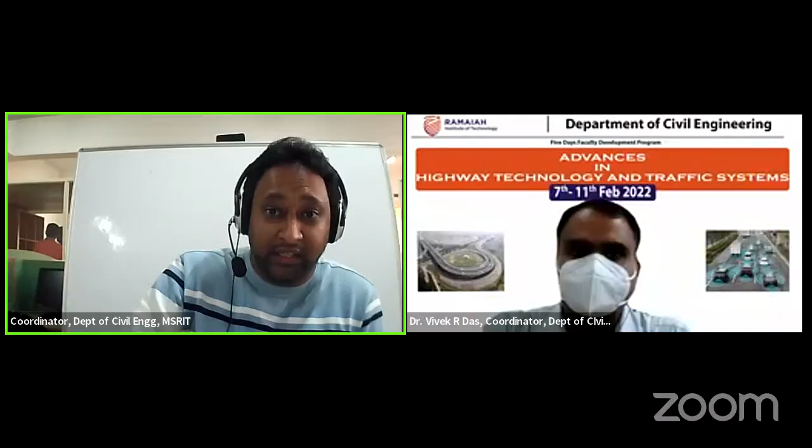On that note, I would like to call upon and welcome our beloved Head of the Department, Dr. M.C. Nataraj, Professor, Department of Civil Engineering, to brief about the department and the institution. So without any further delay, I would like to start with the events. We would be delighted to have your suggestions and questions at the end of the event. Enjoy the event. I welcome you, sir.

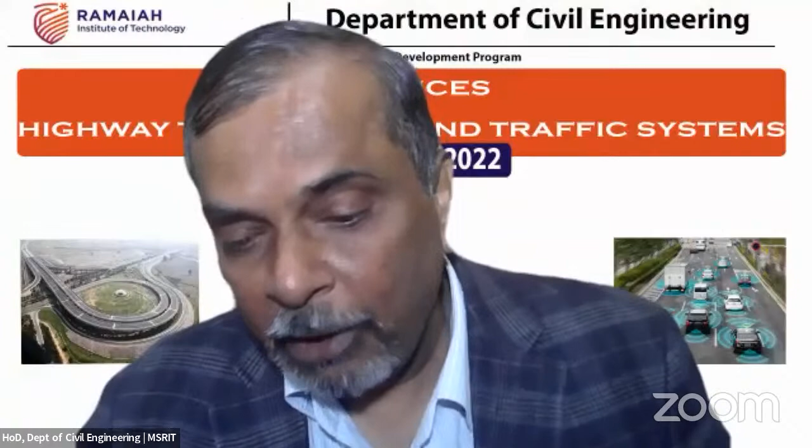So I definitely need to welcome all the speakers who are a part of this 5-day faculty development program. In fact, today we have with us one of the well-known personalities. He is a well-known professional in the civil engineering field, especially in the transportation domain. He is none other than Dr. Satish Chandra, the director, CSIR-CRRI, and the former professor of IIT Roorkee. He will be the first speaker.

And in fact, we have the other speakers. We have Ankit Gupta, associate professor from the Department of Civil Engineering, IIT Bhubaneswar. We have Rajat Rastogi, professor from the Department of Civil Engineering, IIT Roorkee. We have Dr. Ashish Verma, professor from IISc. And we have Arun N.S., a principal engineer and well-known consultant. And we have Partha Pratim Dey, an assistant professor from IIT Bhubaneswar.

And we have M.N. Srihari, my guru. In fact, we worked together earlier, and we have shared our experiences many times with this particular professional. M.N. Srihari happens to be an earlier faculty of MSRIT. We also have Gnanendra Kumar, the additional commissioner from the Transportation Department, Bangalore Urban Division. And we have Madam Kavita, associate professor from RASTA. And also we have Dr. Abhijit, one of the well-known technical persons representing the geotextile division. And also I have four of my own colleagues who are really doing their research in this particular domain.

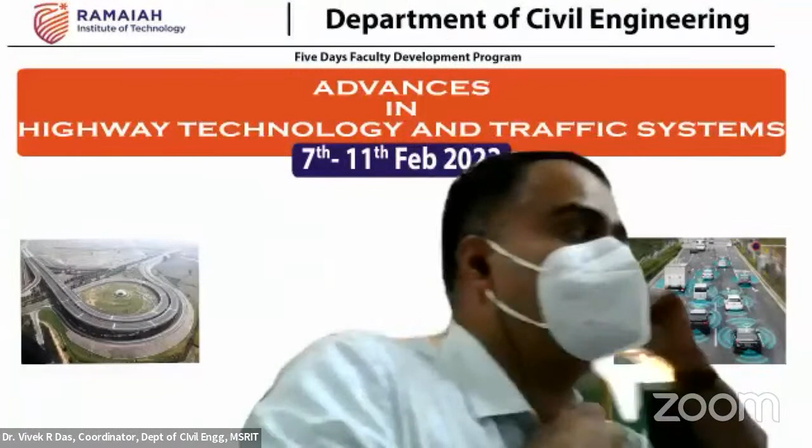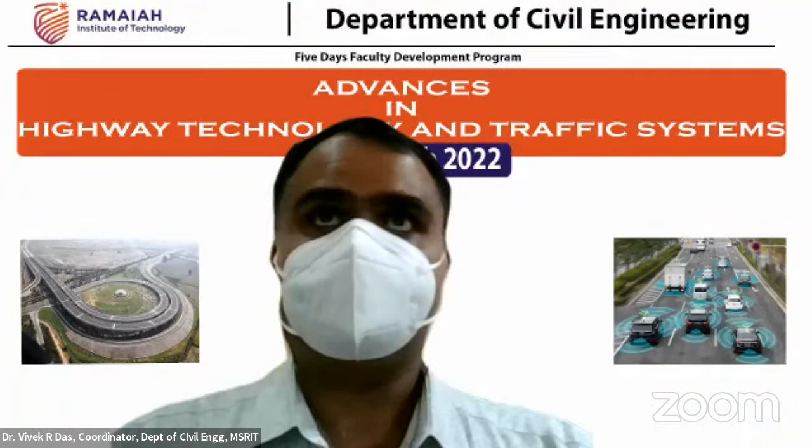Welcome, sir. Dr. Satish Chandra graduated from the University of Roorkee in 1983 with an honors degree in civil engineering and completed his post-graduation in transportation engineering in 1985. He had his doctorate in 1994 from the same university. He joined the University of Roorkee, now IIT Roorkee, as a lecturer in 1985 and became professor in May 2006. He was the Director of the Central Road Research Institute, famously known as CRRI, New Delhi, during 2016 and 2022.

Professor Satish Chandra has contributed significantly in teaching, research, and consultancy in the area of traffic engineering and bituminous material characterization. He has published around 250 research papers in international and national journals and conference proceedings. Many of these research papers are referred widely in India and abroad.

He developed the original concept of dynamic passenger car unit for converting heterogeneous traffic streams into a homogeneous stream of passenger cars. This concept is well received by researchers in India and abroad and has been used in several studies relating to highway capacity in India and other developing countries like Egypt, Vietnam, Cambodia, China, and Thailand. He was a key member of the research team preparing the maiden edition of the Indian Highway Capacity Manual.

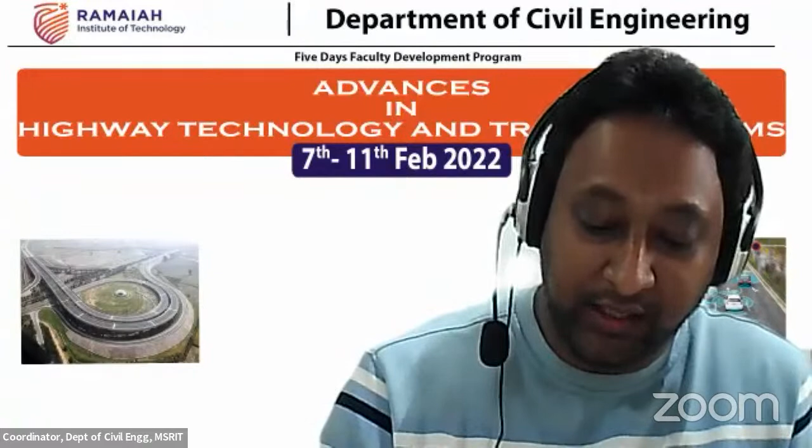He has guided around 21 PhDs and over 100 master's dissertations, and has authored 3 books on engineering graphics, air transportation planning, and railway engineering.

Dr. Satish Chandra has been the recipient of the INSA Visiting Fellowship in 1994 and several outstanding research paper awards by the Institution of Engineers and the Indian Roads Congress. He was conferred with the Outstanding Teacher Award by IIT Roorkee in 2006, and in 2014 he was also invited by IIT Bhubaneswar as an adjunct faculty.

He is a Fellow of the National Academy of Sciences, India, famously known as FNASI. He is also a Fellow of the Institution of Engineers, India, and a member of several other professional bodies. An outstanding teacher and a highly accomplished researcher, Professor Chandra is very popular among students and the transportation engineering fraternity.

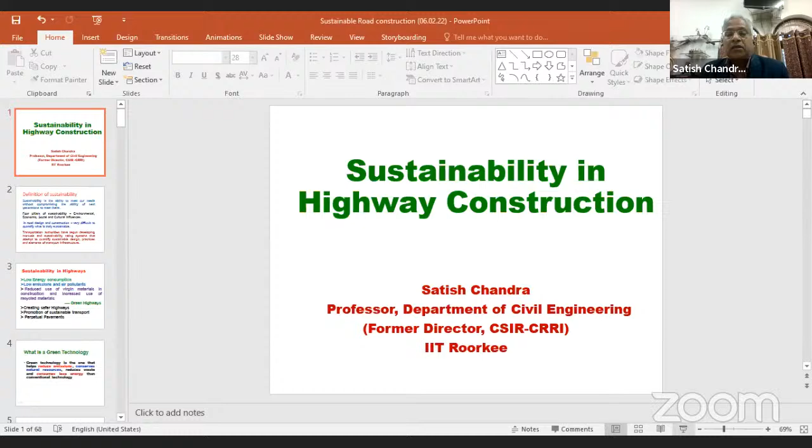Professor and Head, Department of Civil Engineering, MSRIT, coordinator of this faculty development program, Dr. Vivek, and other participants.

The topic given to me today is sustainability in highway construction. Let me just put it up. This word sustainability has been discussed at several forums, at IRC, in the ministry. Its definition basically changes with the field also. If you look at the definition of sustainability, it is the ability to meet our needs without compromising the ability of next generations to meet theirs. That is a very general description of sustainability, meaning the resources are to be used today while keeping in mind the needs of the next generation.

The 4 pillars of sustainability are environmental, economic, social, and cultural influences. So anything which basically does not harm the environment, which is economical, and fits into social and cultural influences, is sustainable.

In road design and construction, it is very difficult to quantify what is truly sustainable. Therefore, the transportation authorities have begun developing manuals and sustainability rating systems that attempt to quantify sustainable design, practices, and elements of transport infrastructure.

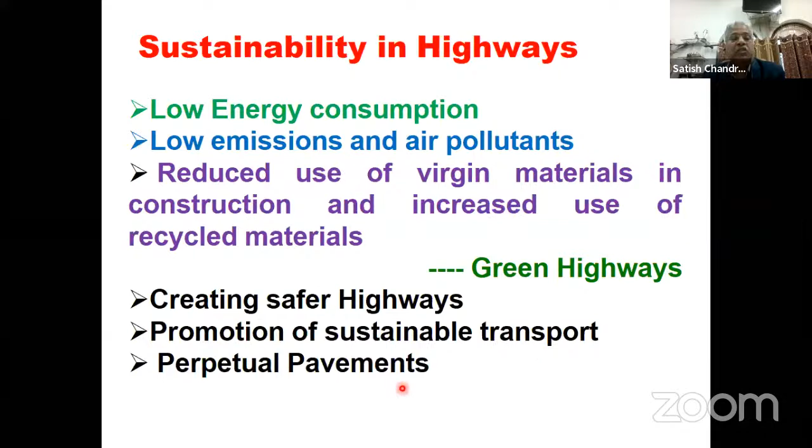Now, when you meet out these 3 conditions, then we call them green highways. And in sustainability, if you extend the definition after construction also, then it also includes creating safer highways, promotion of sustainable transport systems, for example electric vehicles, which Government of India is pushing a lot nowadays, and perpetual pavements, which are practically maintenance free.

Now, when we say green highways or green technology, what is a green technology? A green technology is one that helps reduce emissions, conserves natural resources, reduces waste, and consumes less energy than conventional technology. So if you are able to conserve natural resources, for example replacement of hard stone aggregate, that's a green technology.

If you are able to reduce the emissions, for example if you can avoid heating of bitumen at site during construction, or lowering down the temperature of the heating, that is green technology. So basically, if you can use waste material in construction, that also becomes green technology. I'll give you a few examples of green technology in subsequent slides.

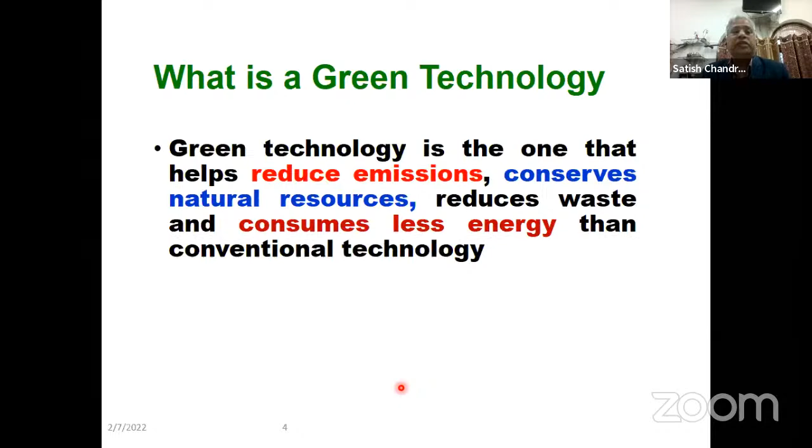Now, every road construction activity needs thousands of tons of material such as aggregate, concrete, asphalt, and steel. And all these are non-renewable resources. Just to give an idea how much aggregate is being consumed in road construction, 1 kilometer of two-lane asphalt road with aggregate base can require up to 25,000 tons of aggregate rock.

And in 2021, India constructed 13,298 kilometers of national highways. Now you can imagine how much aggregate is being consumed in road construction.

This 13,298 kilometers is of national highways only. There are state highways, programs under PMGSY, state government programs also, maintenance of highways also, that will require huge amounts of aggregate. And aggregate is non-renewable. Many states have now stopped mining, and now they are finding it difficult to get hard stone aggregate. This is where basically this green technology should be used, or comes into picture.

Just to give an idea, out of total CO2 emissions, the transport sector has a share of about 13%. And out of this 13%, almost 80% is from road transportation. So when we say green technology, basically our aim is to reduce these CO2 emissions through transport sector activities.

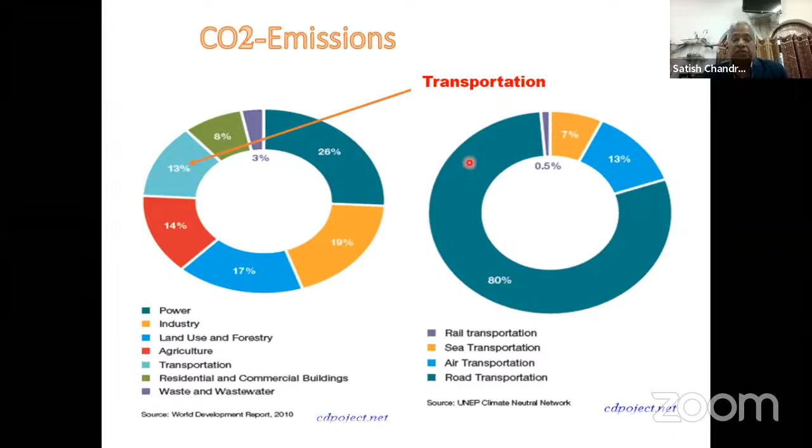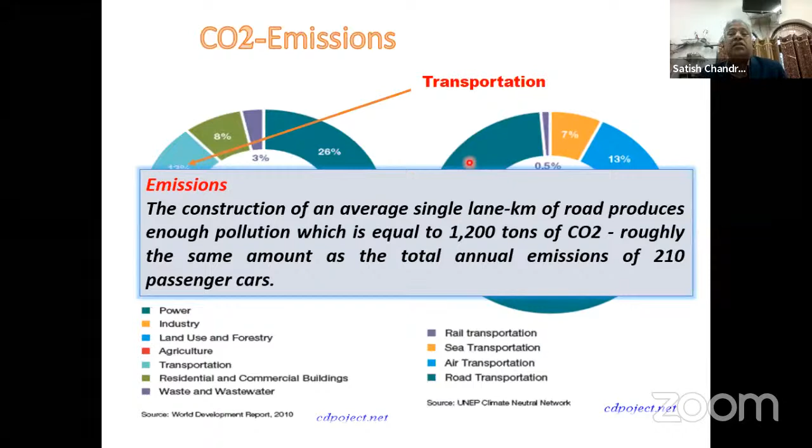And the construction of an average single lane kilometer of road produces enough pollution, which is equal to 1,200 tons of CO2 - roughly the same amount as the total emissions of 210 passenger cars in 1 year. So you can imagine the size of the problem, the dimension of the problem. That is why nowadays sustainability is a very buzzword, and it is being discussed at several forums.

So when you say sustainability or green technologies, there are 4 targets to be met. Number 1, to conserve natural resources, and that can be done either by making use of thinner pavements, or by making use of alternate materials, or stabilization of layers. To reduce emissions, we can use cold mix technology, warm mix technology, or half warm mix technology.

I'll explain all these technologies in my presentation. To reduce waste material, you can reuse the pavement material, that is RAP, and industrial waste, construction and demolition waste, or recycling of pavement, which is also now picking up at very fast speed and consumes less energy. That I told you, cold and warm mixes. Or you can reduce mining by making use of local materials, or you can make use of environment-friendly concrete.

So these are the targets of sustainability: conserve natural resources, reduce emissions, reduce waste, and consume less energy.

IRC 37 2018 talks about the stabilized pavement. Now, this is also one way of reducing the thickness of pavement - cement treated subbase and cement treated base. Now, they are being used nowadays at large scale in all national highways, even expressways also, at state level also, stabilized cement treated bases or cement treated subbases are being used to reduce the thickness of the pavement with the same life.

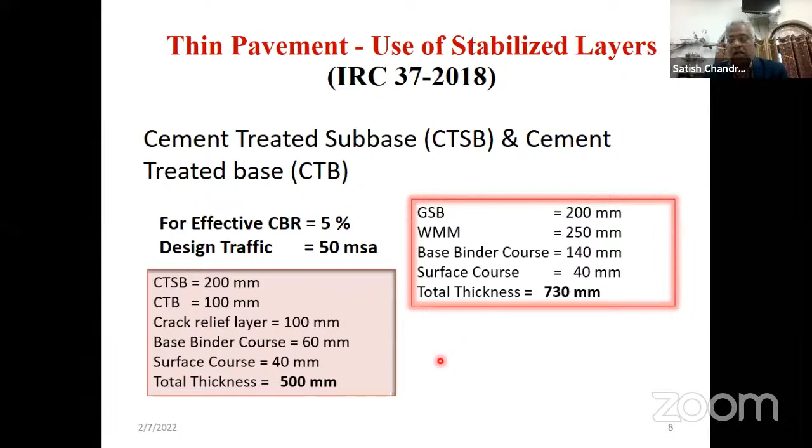Now, IRC SP 59 talks about geosynthetic materials and their functions. Geosynthetic material can be used as reinforcement, again, to reduce the thickness of the pavement. They can also be used in separation, where you have a very soft subgrade, and you do not want the aggregate of subbase to penetrate into the subgrade, or subgrade to penetrate into the subbase layer. We can also use a geotextile or geosynthetic material for filtration and drainage purpose. It is being used in erosion control to protect landslides, or it can be used as a moisture barrier also.

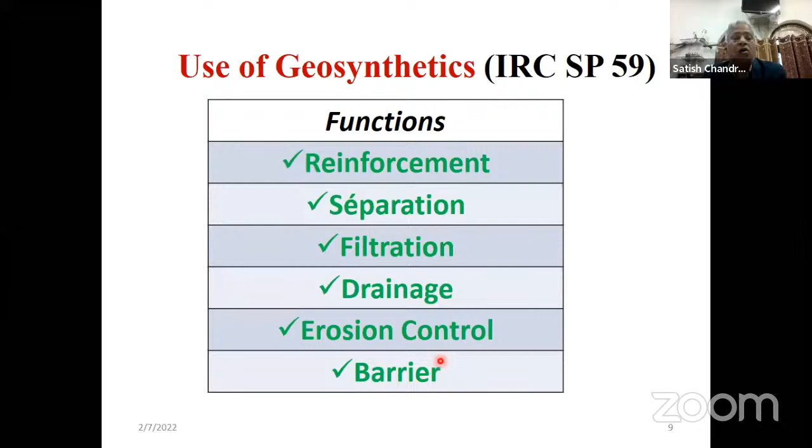There are several advantages of using geosynthetics. One is pavement stabilization. As I told you, when you reinforce a layer, you reduce the thickness requirement in comparison to conventional pavements, and therefore you save the cost also, and you save the time of construction also. And geosynthetics are easy to handle and lay at site, and therefore it's a faster construction and low CO2 footprints.

These are some of the photographs I have taken from IRC SP 59 2019 of different types of geosynthetic materials which are used in highways: geocells, geogrid, geonet, geotextile, and geomat. There are many more. Even you have different types of geotextiles also which are being used.

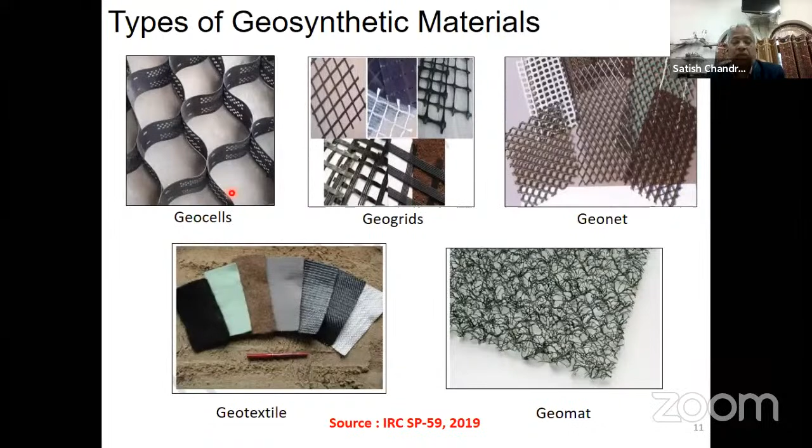Now geocell is coming up very fast, and people are realizing the advantages of using geocell in concrete as well as in flexible pavement.

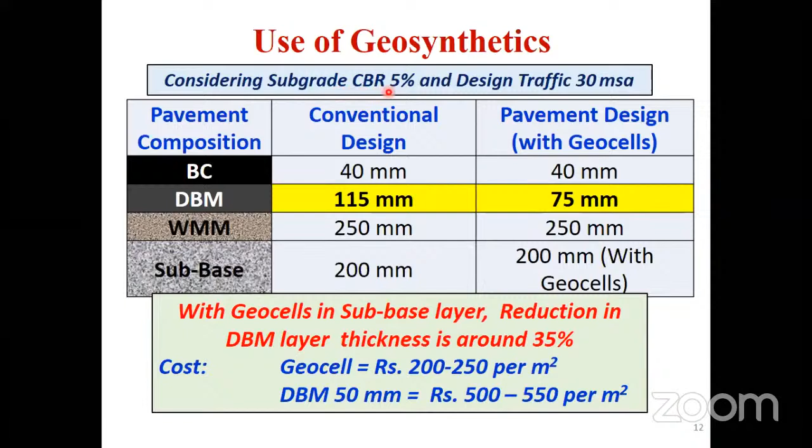And this is another example where you have a subgrade CBR of 5%, and the design traffic is 30 MSA. You design a pavement. Conventional design will require 40 millimeter of BC, 115 millimeter of DBM, 250 millimeter of WMM, and 200 millimeter of sub-base material.

When you use geocell at sub-base level, then you need 200 millimeter sub-base with geocell. Above that, you provide 250 millimeter WMM, same, but DBM layer can be reduced from 115 millimeter to 75 millimeter. Now, why we are reducing basically DBM? It is because this is the layer which is most expensive in comparison to WMM and sub-base, and 40 millimeter BC. So when you use geocell in sub-base layer, you can reduce this DBM thickness by almost 35%.

And a question is always asked: what is the economy? Just for the information of the participants here, I would say that geocell cost is around 200 to 250 per meter square, whereas cost of laying 50 millimeter DBM is 500 to 550 rupees per meter square. So it is not expensive to use geocells. It is economical also. It will give lesser thickness of the pavement, and it will provide faster construction of the road.

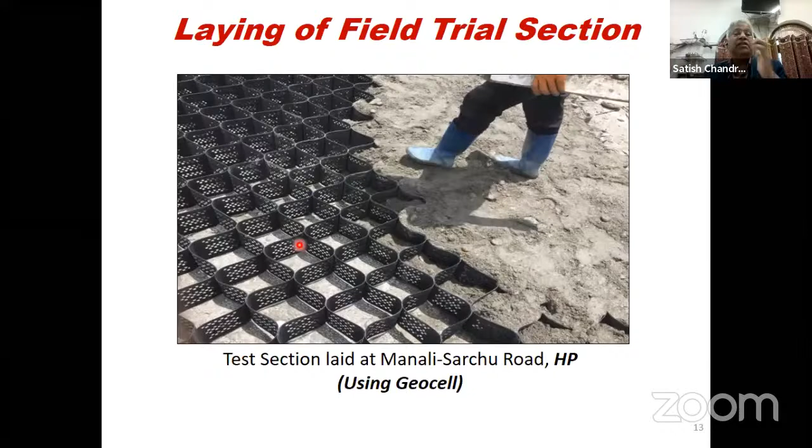Now this is one test trial section which is being laid nowadays in Himachal Pradesh using geocell, and this is the road owned by BRO near Manali Sarchu Road. That is a test section taken for demonstration of use of geocell in flexible pavement. And another section which has been laid very recently in Arunachal Pradesh is with GeoGrid.

Now, this is also, you can see the roll here, you can spread, you can lay this very easily, it doesn't require any skilled manpower. And above that, you provide the layer of base course. This reinforcement layer can be at any stage. It can be between base and sub base, or it can be between base and bituminous course also.

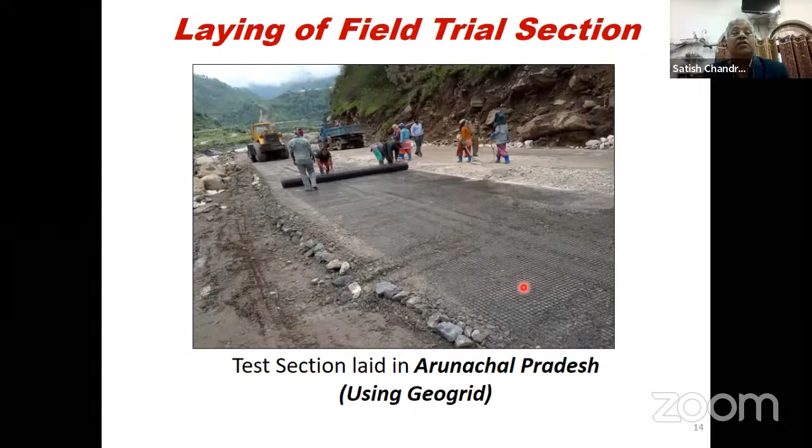Now, after these sections are laid, they will be monitored for 3 years for their performance, and then a report will be sent to IRC for improvement in the IRC code. That is how basically codes are framed.

Another important point which I would like to discuss with you is pavement recycling. Now, this is also coming up in a very fast way nowadays, and people are recommending pavement recycling. What is recycling? Recycling basically is the reuse of pavement material after some processing. So what happens is that when a road has failed, you use the top material or maybe the top 2-layer material to reconstruct the same road.

This process can be either cold or it can be hot. And in cold also, it can be either in plant or it can be in situ. And therefore, pavement material recycling can be classified into 4 groups. That is, pavement recycling can be cold or hot, and cold can be in-plant cold or in-place cold, and hot can be in-plant hot recycling and in-place hot recycling. All the four methods are in use.

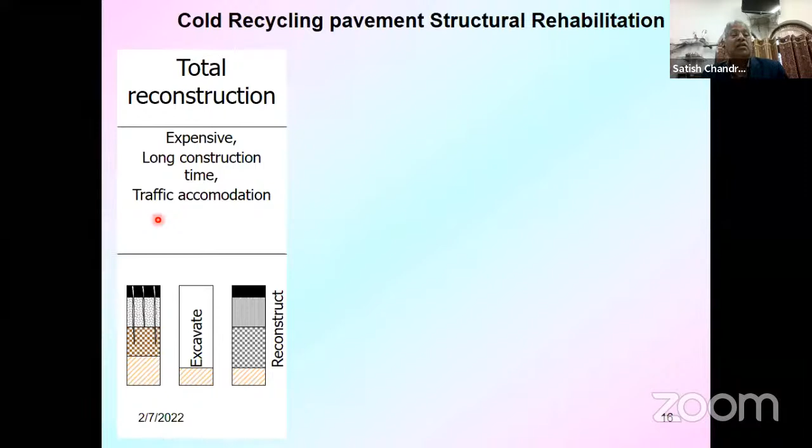Say this example. Let us say you have a road section where very deep cracks have developed, and they have penetrated up to the level of subbase. Now, one option is that you excavate this material, the complete material, and reconstruct the highway. It will naturally be very expensive. It will require long construction time, and you need to accommodate traffic for a longer period, which is also sometimes very difficult because you do not have an alternate route available. So during construction, you may have to provide diversion routes.

Another option could be that above this cracked surface, you provide a thick asphalt overlay. First, you provide a layer of, let us say, DBM or maybe WMM, and then you provide a thick overlay. Now, this is relatively a quick method, but the problem will be of elevation. And it is a very important consideration when you are working in urban roads. In many cities, what we have seen is that when you provide overlay after overlay every 3 or 4 years, the pavement elevation goes up. And that creates a problem of drainage.

Now, this will also have the problem of reflection cracking. That's a very typical characteristic of flexible pavement, that if these cracks are not treated properly at the time of overlay, then they will reflect to the surface in no time. That is called reflection cracking.

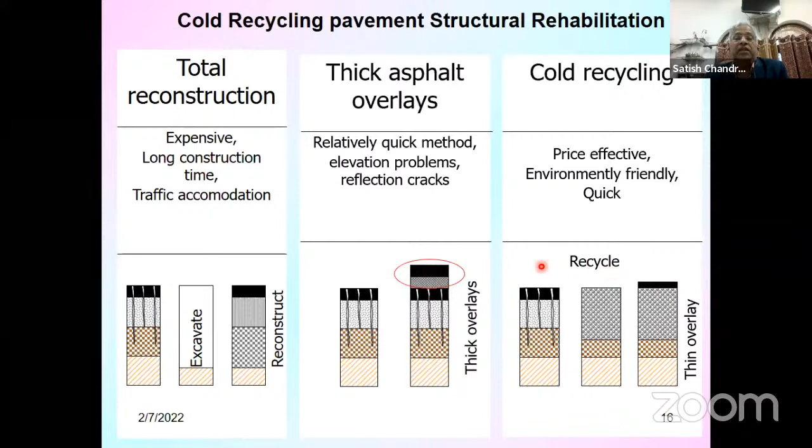The third option could be that you recycle the material of this pavement. You basically excavate this material, add some virgin material depending upon the requirement and the grade of the material, and then above that, you provide a very thin overlay. This is very cost effective, environmentally friendly, and a quick method. This is what is being adopted nowadays. In many projects of national highways where the road has prematurely failed, recycling is being adopted because it will not require aggregate to be transported from long distances. And therefore, you can have in situ cold recycling, or you can have in-plant recycling.

In-place or in-situ recycling is opted where material from the upper layers of an existing pavement is to be recycled. And this treatment is popular due to less material haulage. I told you, you don't have to transport the material either to the plant or from the plant to the site. In-plant processing is normally opted where recycled material is used in new pavement layers. So what I'm trying to say here is that in case of in-plant recycling, the excavated material from the site is stored in the form of stockpiles, and then this material is used for other strengthening purposes.

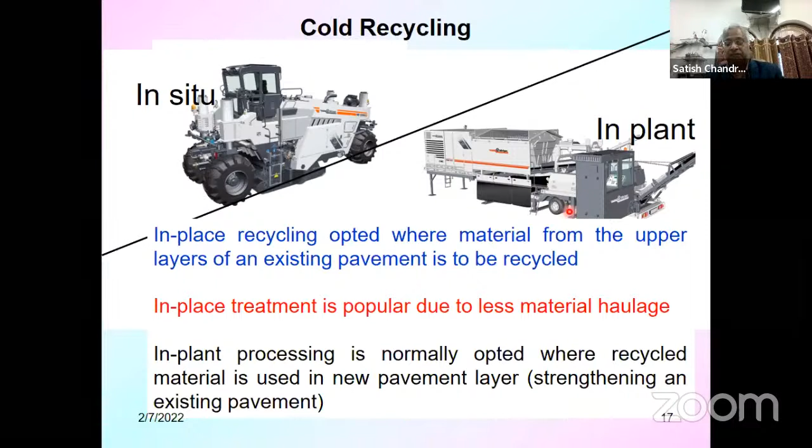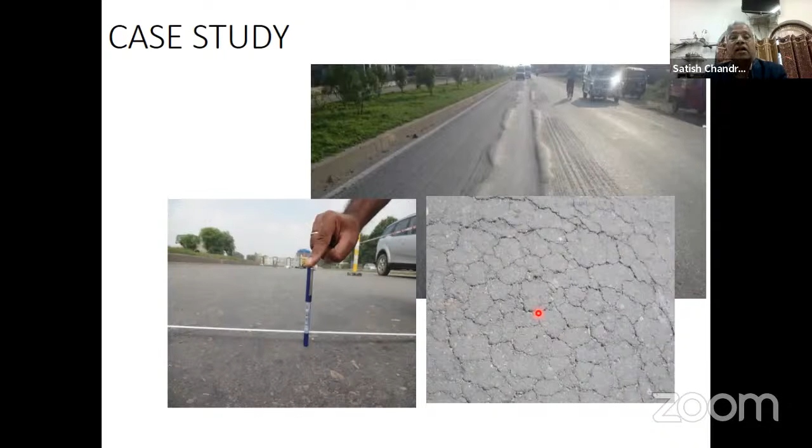Now let us take one case study. This is the highway. I would not name the highway, but this is a national highway which prematurely failed. And you can see the amount of rut and the type of cracking here. It failed because of several reasons. It was investigated in CRRI, and the deformation, depression, settlement, everything was there. And then we studied two options. The first option was that you go by conventional methods, where you provide an overlay of granular subbase. It is basically almost reconstruction of the highway.

And then dense bituminous macadam of 185 millimeter. And above that, you provide a layer of 50 millimeter bituminous concrete. The second option could be that you recycle the pavement. And therefore, cold in situ recycling using foam bitumen approach was considered.

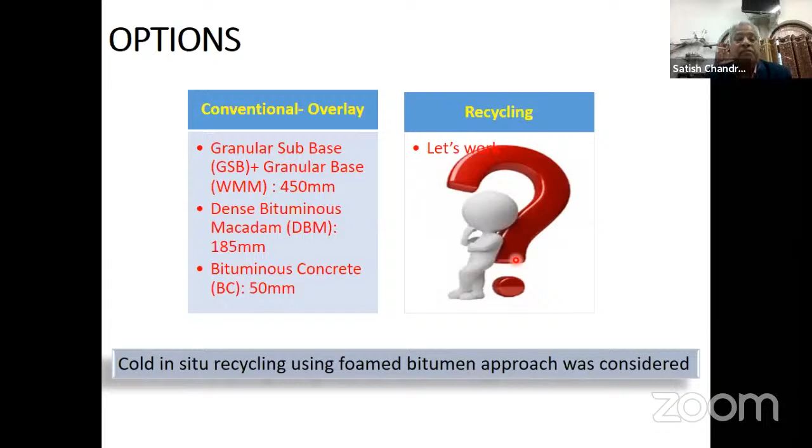Now, when I say foam bitumen, it is basically when you use the material in base course, then it is called bituminous sub base course, or you can say bitumen stabilized base course. So here bitumen is foamed, and the green effect of this, if you compare the conventional overlay where you are providing so much of thickness, 450 plus 185 plus 50 millimeter, and in case of cold in place recycling, you provide GSB of 450 millimeter, and this material is bitumen stabilized material, BSM of 175 millimeter.

Now this is the material which is excavated from the site. Same material is used with some virgin aggregate depending upon the grading required and grading available, with some rejuvenator. You use the same material and compact it there in the layer of 175 millimeter. And above that, you provide a DBM layer of 70 millimeter and then 40 millimeter. So this is what is basically done.

And by foaming technique, you can use up to 80% of recycled aggregate. That will require 60% less bitumen, because bitumen is already present in the top layer. So that bitumen can only be rejuvenated. You can use that bitumen. And there are methods of designing the mix for cold in place recycling and hot in place recycling.

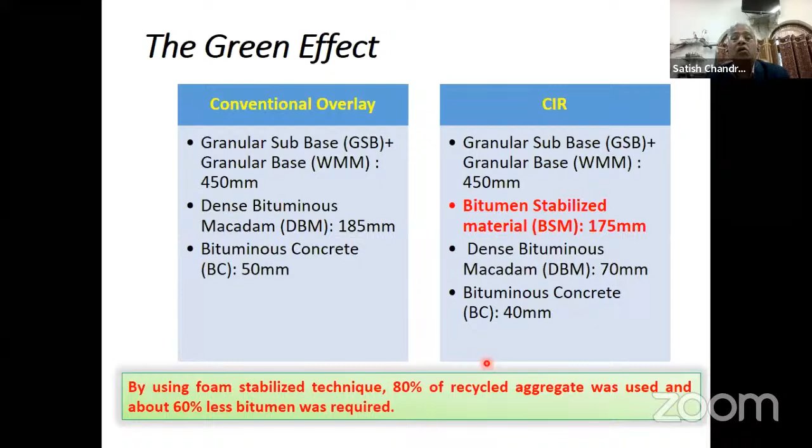Now, hot in place recycling, in this case, the surface is heated by infrared radiation, and then it is milled in 2 steps to a desired depth of 20 to 60 millimeter. The mix of the old asphalt layer can be changed directly by adding virgin asphalt and new type of bitumen, or sometimes you need to add some rejuvenator also. Because this bitumen, which is available in the layer, becomes very hard because of aging, and sometimes adding virgin asphalt is not sufficient, and you may have to add some rejuvenator to bring the viscosity down.

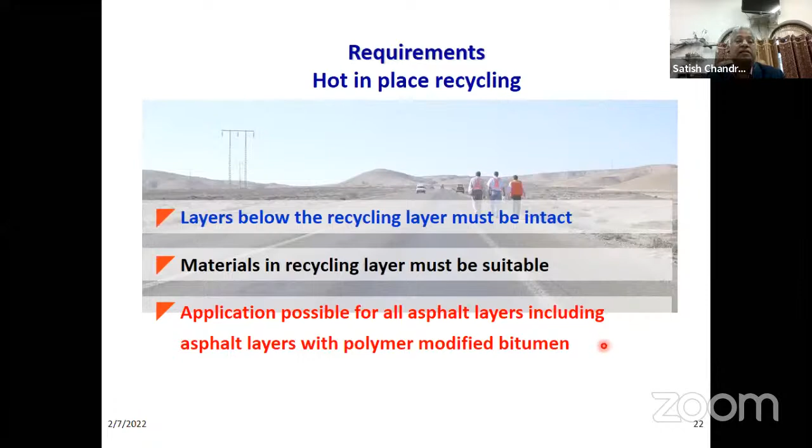Applications of hot in place recycling can be several. It can be used to treat raveling in the bituminous layer or bleeding, corrugations, shoving, slippage. These are all pavement distresses, and I hope you all know these distresses. I am not going to discuss all this because this is not the scope of the presentation today. And hot in place recycling is suitable for surface course rehabilitation with a maximum working depth of 60 millimeter.

So in this process, the top layer is heated through infrared rays, and this is then excavated. The top layer of 60 millimeter depth is excavated. It is transported to the next machine at the site itself, where it is tested for grading and binder viscosity, and the deficient materials are added into it. And then after the new material and the old material are mixed, it is compacted there itself.

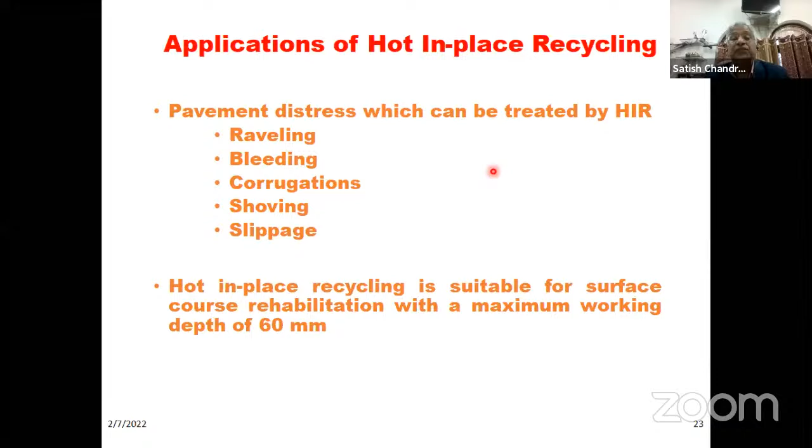Another important consideration in sustainability is use of waste materials. And there are several types of waste materials which are available nowadays in the industries. And industries are facing a lot of difficulties in disposing of all these materials. And therefore, we should always try to see whether these waste materials can be used in roads, and if yes, in which layer and in what quantity.

Now, I have listed here a few. Fly ash, you all know, iron and steel slag coming from steel industry, and steel industries are facing a lot of problems. Ministry of Steel is also concerned about it, and looking for a solution for disposing of this slag.

Copper slag; construction demolition waste is another problem in every city. Foundry sand, although its quantity is not very high, can also be used in sub-base as replacement of fine material. Now, municipal solid waste is a problem in almost every city.

Overburnt brick bats. I can tell you here that our northeast region has a severe problem of non-availability of hard stone aggregates, and they are transporting these aggregates from a very, very long distance. Andaman and Nicobar area, for example, they are transporting from the mainland. So is it possible to use these overburnt brick bats in sub-base or base course by proper treatment of this material? Not exactly, not as it is. By making use of lime or some cement, can we use these materials?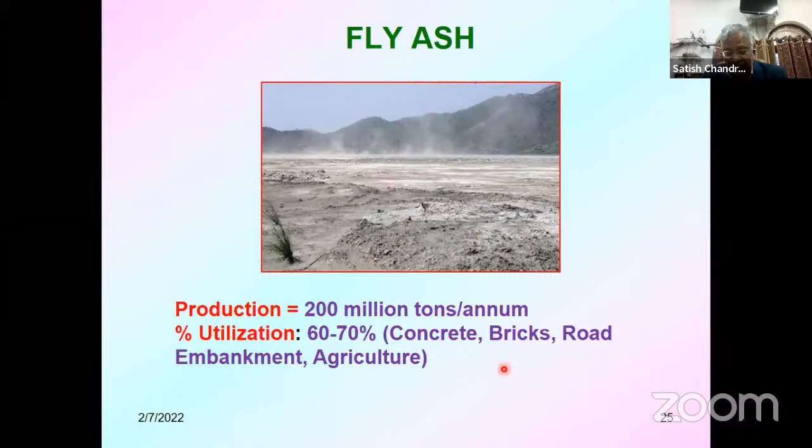The thermal power plant stations are facing this problem of disposal of fly ash. And there can be several applications. It has been researched for the last 40, 50 years. Laboratory studies have been conducted extensively on use of fly ash in different layers of a pavement, and results are encouraging. The only point is that it has not been used in the field for a very long time. But now people have realized, IRC codes are also available, and even our field engineers are realizing that fly ash is a good material and it should be used.

Because when you use fly ash in construction of embankment, you make its bulk use. It can be used as a backfill of retaining walls or reinforced earth walls. It can be used as stabilized fly ash in subgrade or sub-base and base course of a road pavement. In fact, there was a project sponsored by the Department of Science and Technology very recently when I was in CRRI; we worked on how to make use of fly ash in sub-base and base course of a road pavement. It can be by stabilization through lime, which you call lime fly ash concrete.

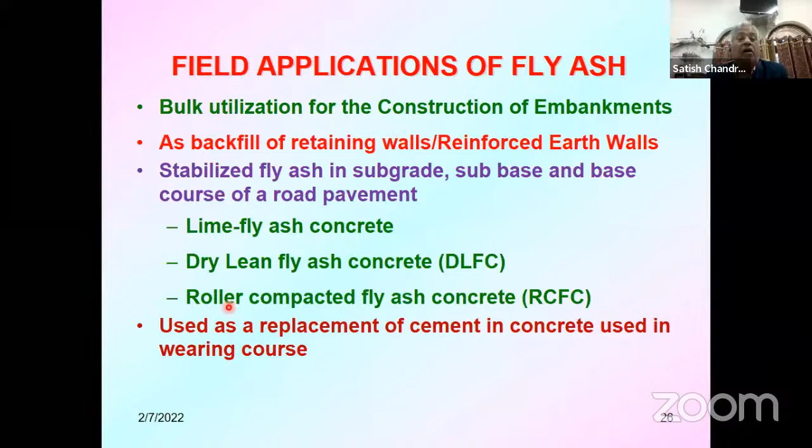It can be used in dry lean concrete, or in roller compacted fly ash concrete. It can also be used as replacement of cement in concrete when it is in the wearing course. So there are several examples in the field now. One example which I always give is how the bulk use of fly ash was made in the approach embankment for the second Nizamuddin Bridge at Delhi. It was in 1998. The length of this embankment was 1.8 kilometers, height was 6 to 9 meters. It was on River Yamuna.

And 1.5 lakh cubic meters of fly ash was used in this, and that was a saving of 1 crore because you are replacing natural soil. This saving was 1 crore in 1998. Now, this saving is only what you see in monetary terms. But imagine the saving to natural resources. When you take natural soil to make the embankment, how much damage you cause to the environment. So it is basically replacement of soil by ash.

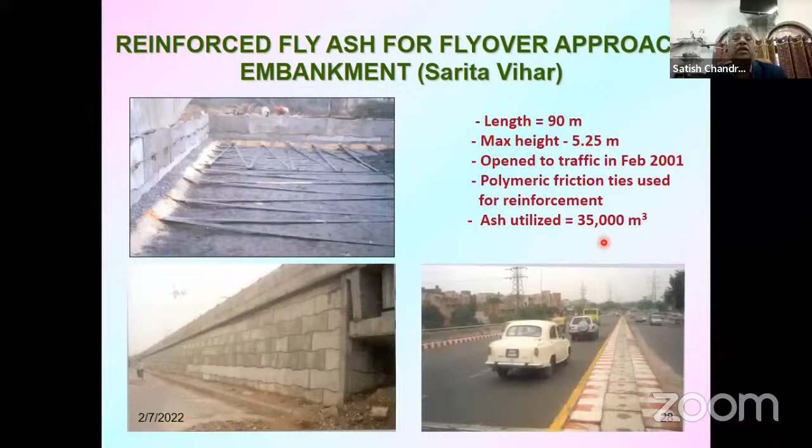Now, utilization of fly ash in sub-base and base layers of road pavement. As I told you, it can be cement stabilized fly ash and can be used either in base or sub-base. We have demonstrated it. It can be stabilized with lime also and can be used in base course, or dry lean cement fly ash concrete as base course, or even roller compacted concrete in wearing course.

And precast block paving, or you can say precast paving blocks, are nowadays being made using fly ash, which can be used for pedestrian walkways, for parking, and similar other uses.

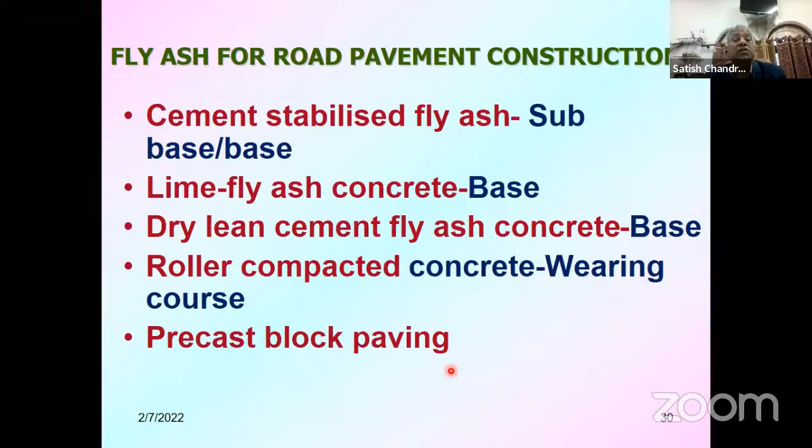Another waste material which is coming from the industry is copper slag. Its production is 2 million ton per annum in the country, and the present rate of utilization is only 10 to 20%, and that is particularly for landfilling. And these are huge mountains in the industry which are basically building up.

So this was also studied in laboratory, and this can also be used similar to fly ash. This can also be used in road embankment. And this was the cross-section of embankment designed for the Madurai Tuticorin section of NH45B, and it was implemented. Now here, 50% copper slag and 50% pond ash was used. Both materials are waste materials.

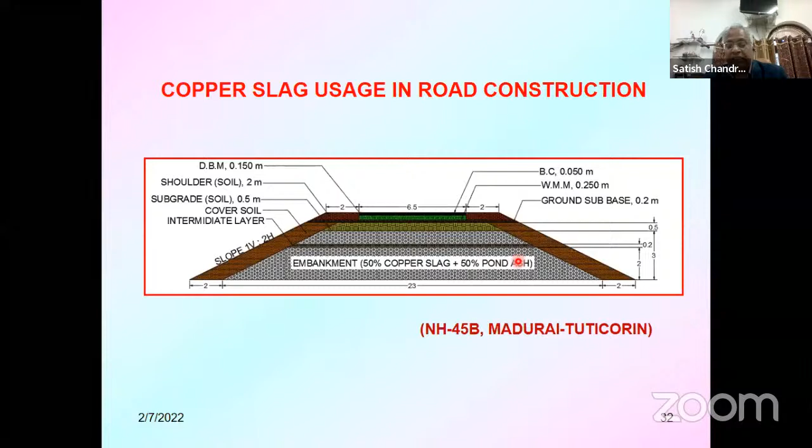And again, you see the 2-meter layer of this material and then 20 centimeter of natural soil. That is basically sandwiching the layer of waste material between layers of soil. This was constructed on NH45B. That is the first stage of mixing of copper slag with soil or copper slag with fly ash. Both options were proposed and used to compare the results.

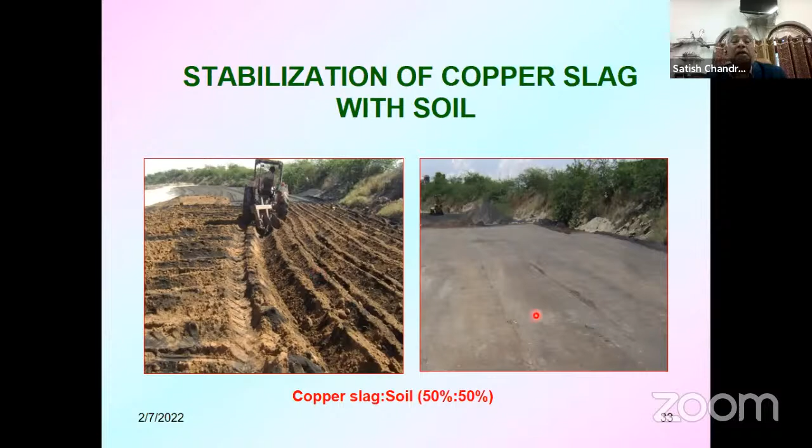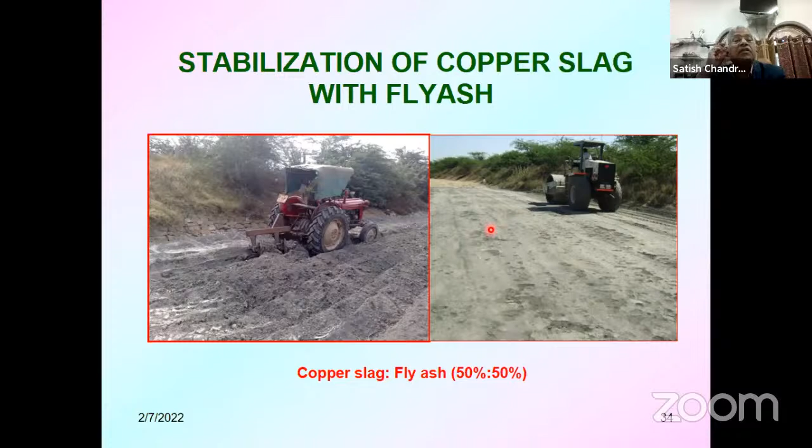And this is after compaction of copper slag plus soil mixture. And this is the compaction of copper slag and fly ash in 50-50%, and that is the finished surface of the layer, not the embankment, layer. And this was opened to traffic. It is going very well. It was monitored for 3 years, and this is on the Madurai Tuticorin section of NH45B.

So these materials are now being used because when you use them in the field, you have the confidence. The engineers will have confidence, and that is how IRC codes are made. You see, the basic problem in road industry, this is my experience of the last 6 years in CRRI when I had discussions with either the ministry or IRC, is that any new material cannot be used in field unless it becomes part of specifications. And the material will not become part of specification unless you demonstrate that it will perform well in the field. So that is the kind of vicious circle you always get.

And therefore, the strategy being used nowadays is that we take some trial sections on national highway or state highway to demonstrate a technology or a material, then monitor it for 3-4 years, and then approach IRC: look here, this is the report, and now you have to make the code. This section's performance was also observed for 2-3 years, and it was fantastic, as good as a normal section.

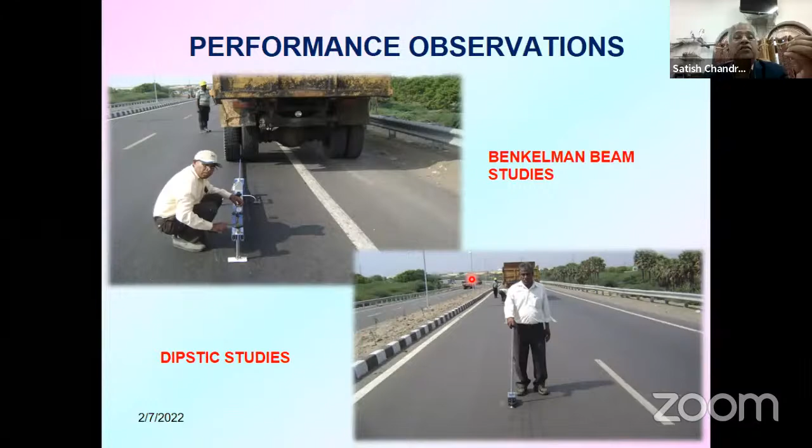Because probably you know how the stress is developed in a pavement section. Very little stress goes to the embankment layer. So embankment layer material, provided it satisfies certain conditions of cohesion and density, can be used.

Another waste material which is available now is phosphogypsum. And this was also demonstrated in field where an embankment was made. There again 2 types of trials were made. In one trial, the phosphogypsum embankment was made, and above that subgrade soil of 500 millimeter was used. In the other, the embankment was made of soil and the subgrade was made of phosphogypsum, and both these sections were constructed in the field.

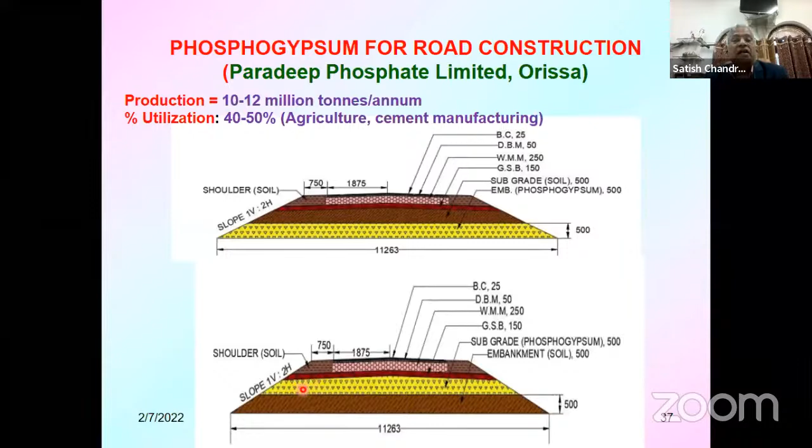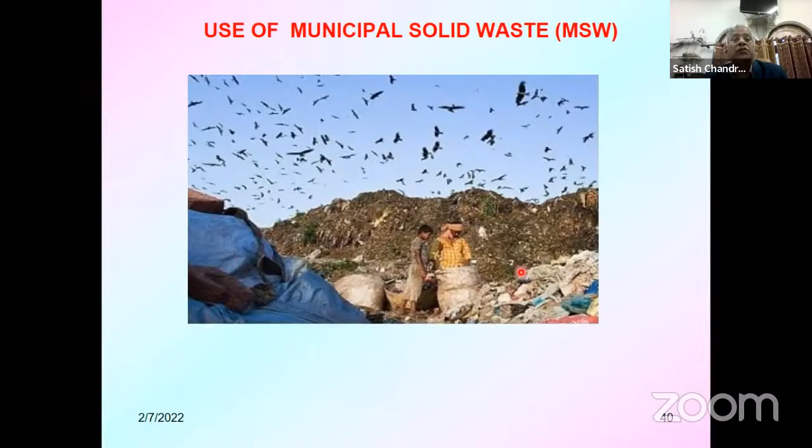Now, this is another problem of every city, whether a small city or big city: municipal solid waste. It's just a photograph of one site in Delhi where huge mountains of this municipal solid waste are piled up. And the government of Delhi and government of India both are worried about how to make use of this municipal solid waste, because it is not only environmentally hazardous, but it is a safety problem also, an environmental problem also.

And we took up this challenge in 2016 when I joined CRRI. Immediately after my joining, we tied up with NHAI and started working on how to make use of this municipal solid waste in road embankment construction. And we submitted this report to NHAI, although it could not be taken to field because of several reasons. And I'll tell you one reason why it could not be implemented yet, even after 6 years.

And we also proposed design of cross-section for field construction. And we studied environmental feasibility also. And what we found is that almost 65% of this material can be used in the embankment. The challenge here is that this material is very heterogeneous. It contains plastic, it contains wood, it contains metal also, it contains C&D waste also. So many things. And it has almost 30% moisture. So it should be dried, it should be segregated, and then it can be used.

Now, this is where the East Delhi Municipal Corporation or South Delhi Municipal Corporation are hesitant, because this drying and segregation of this material will require huge cost. And what basically I was trying to convince the authorities here when I was in CRRI is: don't look at the cost of segregation and drying. Look at the cost of environment, cost of the land. We are basically vacating 80 acres of land, prime land in Delhi. But you know the government system, how it works.

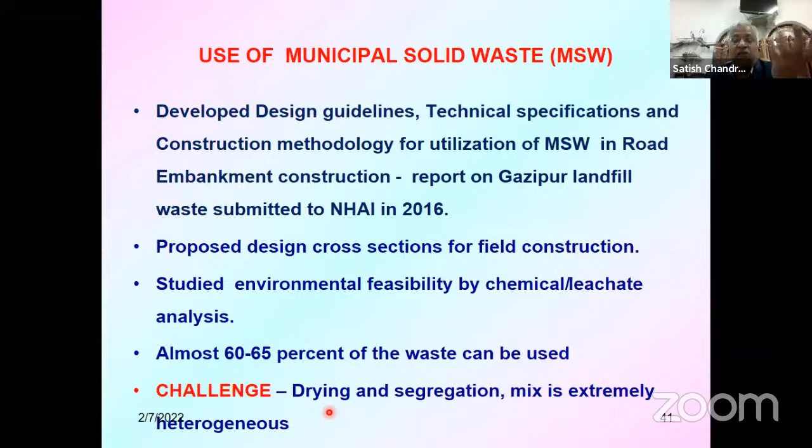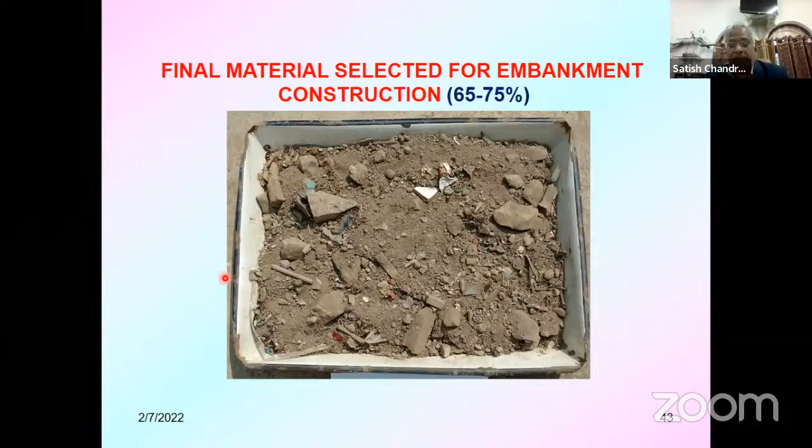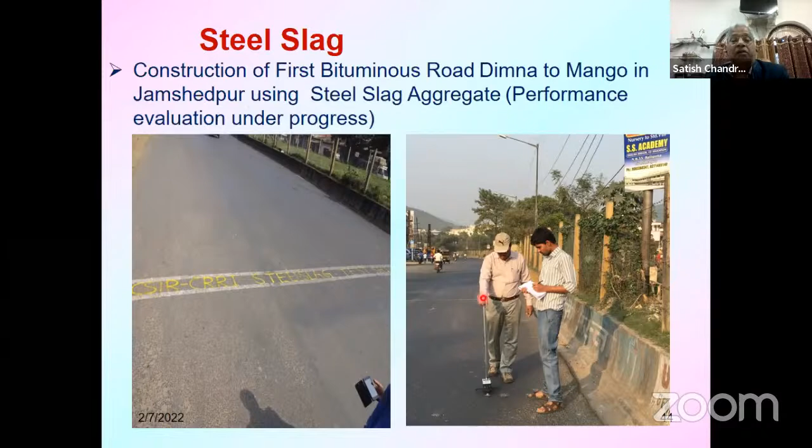Now, steel slag coming out of steel industries. Using steel slag also, CRRI constructed a test track on this Dimna to Mango in Jamshedpur using steel slag aggregate, and performance was evaluated and it was fine. Similarly, another section was made from Ranchi to Jamshedpur on NH33 using steel slag. And the important point is that steel slag is very heavy, and therefore requirement of bitumen is also low.

It can be used in base course, it can be used in sub-base course, it can be used in bituminous course also. The only problem when you use it in bituminous course is that these aggregates have vesicular structure, and therefore they can absorb bitumen, and this bitumen can ooze out during hot summer, creating the problem of bleeding. And therefore the industries are now working on how to make this steel slag non-vesicular on the surface. So they are changing treating methodologies so that this aggregate can be used in the top layer also. Otherwise, it is very suitable for lower layers.

Ferrochrome slag is another important waste which is available, and it is as good as natural aggregate. Air-cooled, water-granulated ferrochrome slag can be used in place of natural aggregates. And lab studies have indicated that it is as good as natural aggregate when used in the bituminous layer also. Resilient modulus at different temperatures, moisture susceptibility and rutting tests have been conducted.

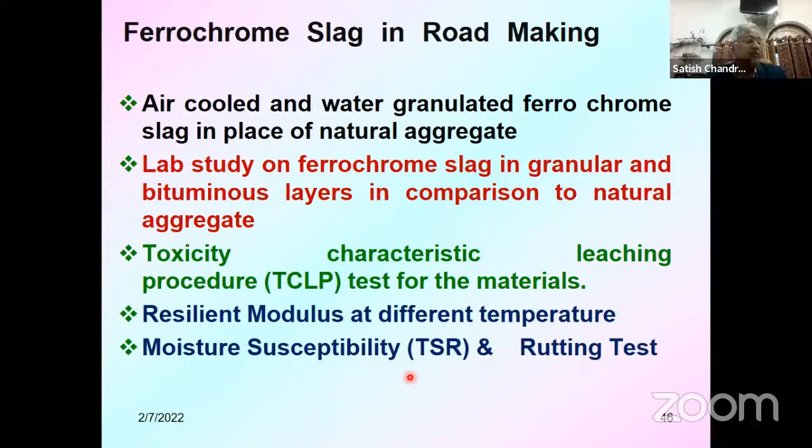I still have 10 minutes.

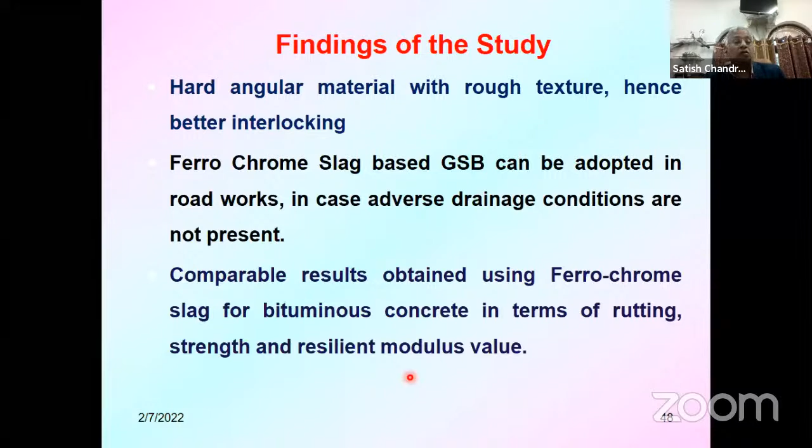Yeah. And comparable results were obtained from ferrochrome slag for bituminous concrete in terms of rutting, strength, and resilient modulus value. Now, waste plastic is another problem. You know it. And there are two methods of using waste plastic in roads. One is called wet process, another is called dry process. In wet process, this material is mixed with bitumen, and in dry process, it is mixed with aggregate.

Dry process is more successful than wet process, because in wet process there is always a problem of miscibility, or compatibility. In dry process, shredded plastic is heated with aggregate at 150 to 160 degrees centigrade, and then mixed with bitumen. It's a normal mixing process, no additional equipment required, and we can use 6 to 8% plastic by weight of bitumen. It has been demonstrated in several projects in Delhi, Himachal Pradesh, Arunachal Pradesh, and Haryana, and it is successful. Now IRC guidelines are also available on this material. This is one test section which was laid using waste plastic in Delhi in 2012.

Now, when you say reducing the energy, there is emulsion-based cold mix construction, which we call cold mix technology. In normal hot mix asphalt, we heat the bitumen and aggregate at a temperature of 160 to 170 degrees centigrade and then mix them, which naturally requires a huge amount of energy. In case of cold mix, we don't need to heat either aggregate or bitumen. It can be done at ambient temperature, and therefore it is environmentally friendly, less energy consuming, low carbon footprint, high production output, and so on.

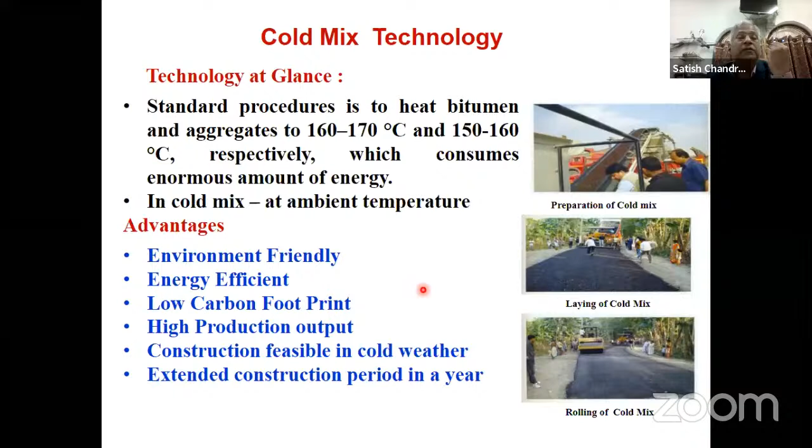Almost 10,000 kilometers of roads have been constructed under PMGSY using this cold mix technology. At present, this cold mix technology is used only for premixed carpet. It has not been developed for high volume roads, but people are working on this technology for national highways also. This is a glimpse of Rajasthan.

Microsurfacing is another technology given in IRC SP81. This is also cold mix technology, and it has been laid on several roads in Delhi. The only issue is that it is not a structural layer; it is just a mixture of polymer modified emulsion bitumen, dense graded crushed mineral aggregate, filler, water, and some additive. Its thickness is about 8 to 10 millimeters only, and therefore it's not a structural layer.

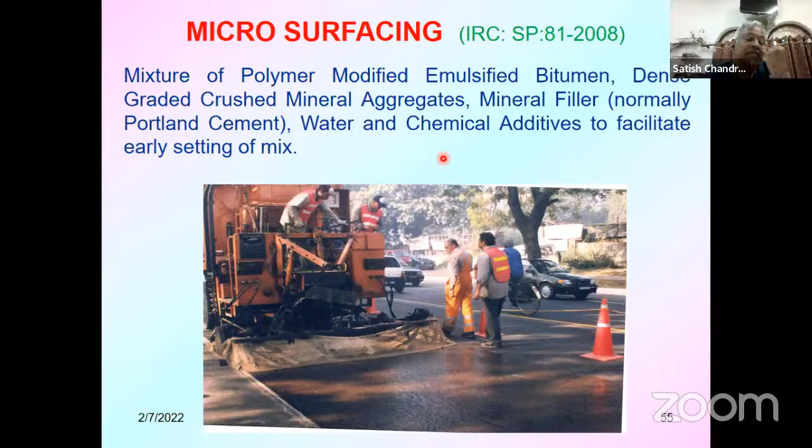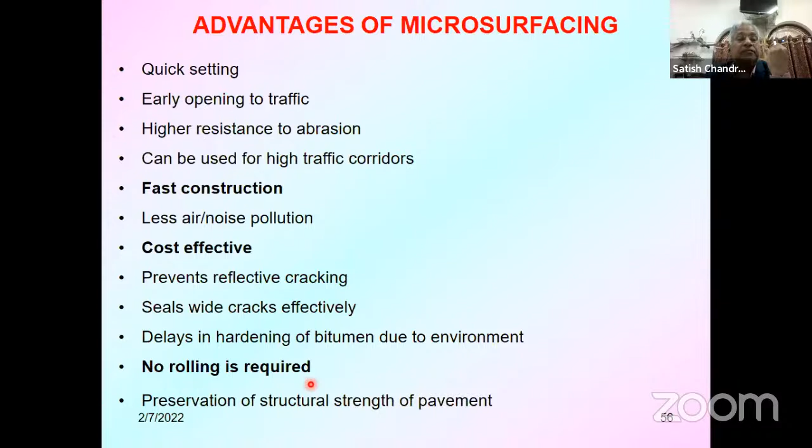There are several advantages, but I would list here only 3: fast construction, cost effective, and no rolling is required because you are using an additive, so it's fast setting.

The limitation is that the temperature should not be below 10 degrees centigrade, and it is applicable when pavement and air temperature are above 8 degrees centigrade and rising. It is not applicable when the finished product freezes within 24 hours.

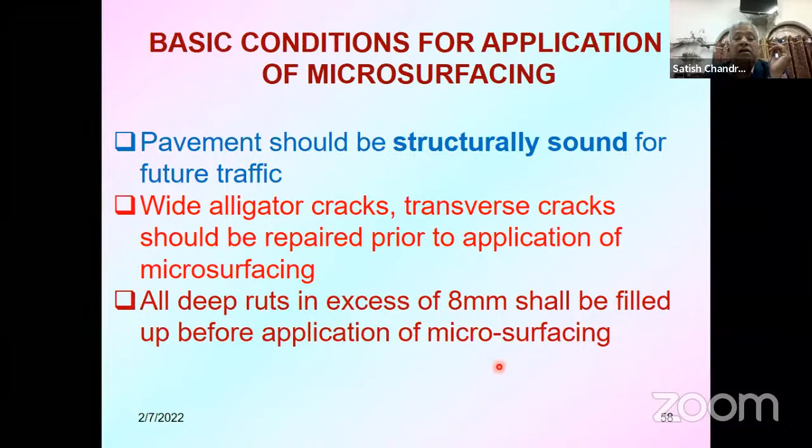The basic conditions: the pavement should be structurally sound, because as I told you, it is not a structural layer, it is only to improve riding quality. Small undulations can be treated. Wide alligator cracks and transverse cracks should be repaired prior to application of microsurfacing, and all deep ruts in excess of 8 millimeters shall be filled up before application, because that is the thickness of the layer, 8 to 10 millimeters. Any rut in the pavement beyond this should be filled up before application of microsurfacing.

As I told you, we have laid this microsurfacing on almost 30-kilometer length in Delhi, and performance of these sections was monitored for 3 years. It is a very good construction.

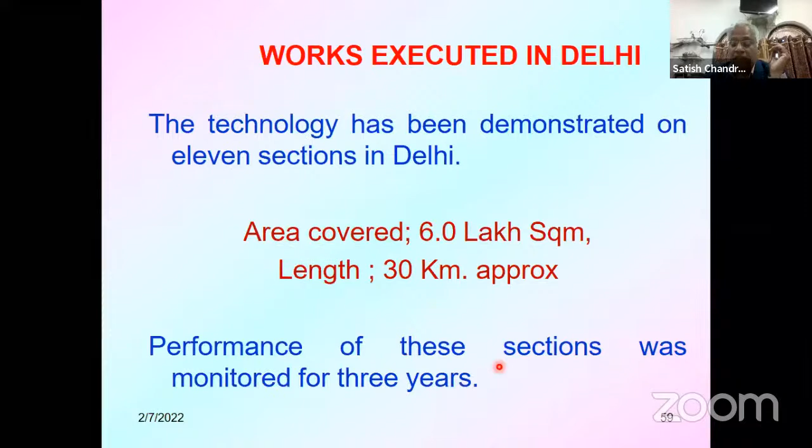Now, something between hot mix and cold mix is warm mix. In warm mix, the production temperature is in the range of 120 to 135 degrees centigrade, in place of 150 to 160. There is another technology called half warm mix, where we can produce the mix even at temperature below the boiling temperature of water, that is 80 to 100 degrees centigrade. These are the emerging technologies which allow mixing, laying down, and compaction of the bituminous mix at lower temperature compared to hot mix.

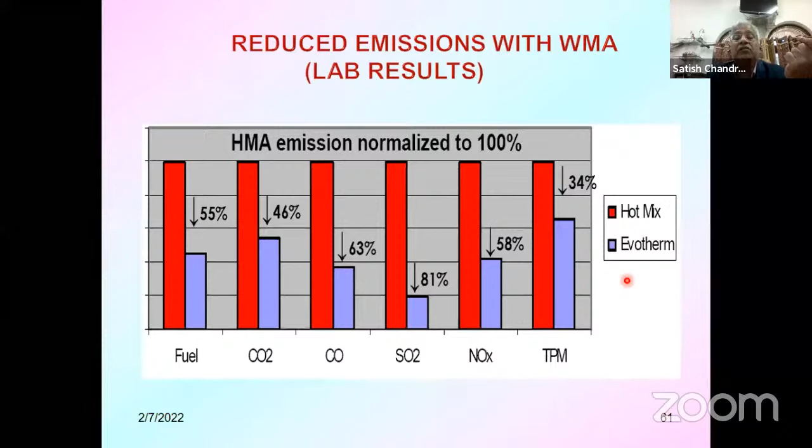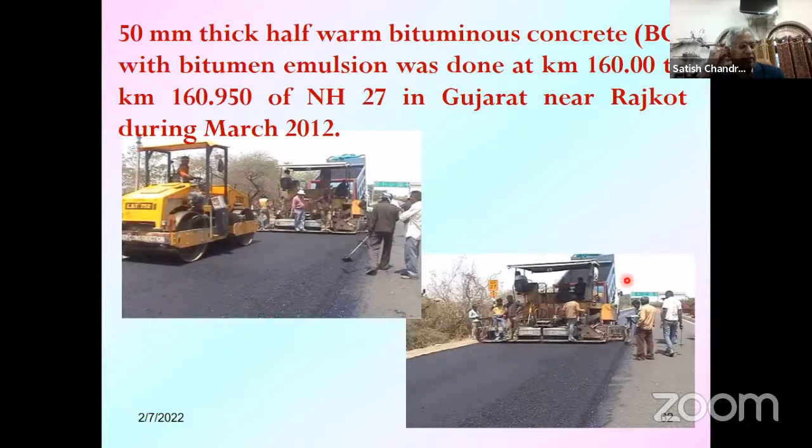This is one section on NH 27 in Gujarat, which was laid in March 2012 using half warm mix binder with bituminous concrete. But half warm mix is not as popular as warm mix.

Now, yeah, another one is green concrete. I'm about to finish now, maybe another 2 minutes.

Green concrete is a type of concrete much like conventional concrete, but its production requires minimum energy and causes least harm to the environment. Again, based on the definition of green material, it is concrete made with waste that uses less energy in production and produces less carbon dioxide than normal concrete. Materials for green concrete can be recycled demolition waste aggregate.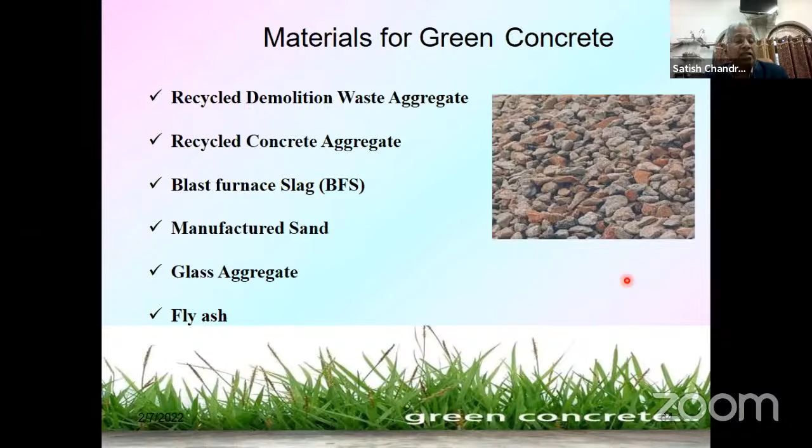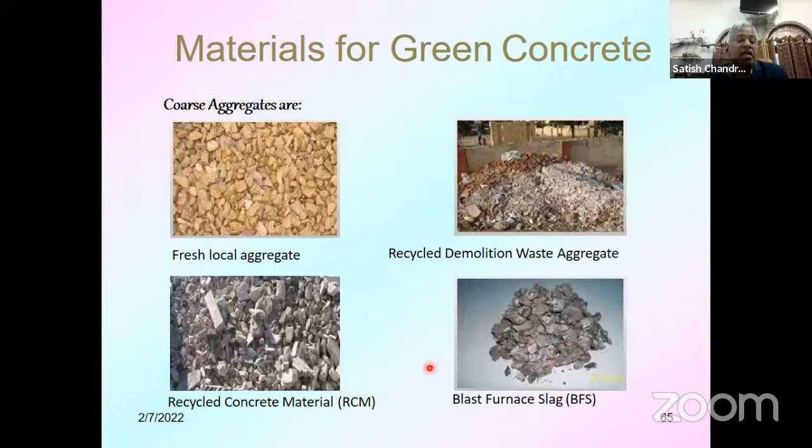It can be recycled concrete aggregate, blast furnace slag, manufactured sand, glass aggregate, or fly ash. These are the materials used in making green concrete: fresh local aggregate, recycled demolition waste aggregate, blast furnace slag, recycled concrete material, or manufactured sand for concrete. Blast furnace slag is also available in the form of sand, and we can also use fly ash.

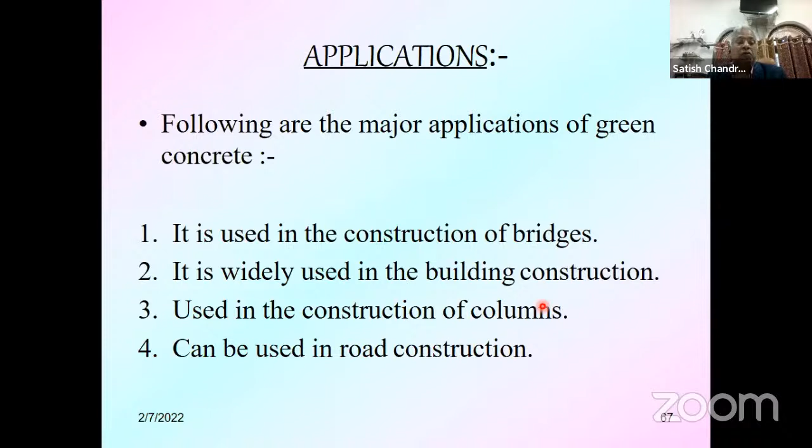Major applications of green concrete: it is being used in construction of bridges. You can make very high strength concrete using these materials. It is widely used in building construction, in construction of columns, and can also be used in road construction, although it has not been tried in roads.

Thank you very much for your patient listening. If you have any question, I'll try to answer that.

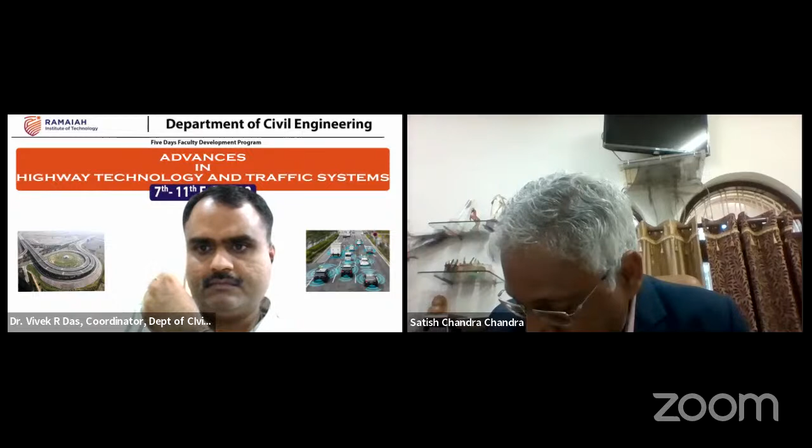MSW is municipal solid waste, and fly ash is another type of waste material. It's not good to compare these two, but if you are using in embankment, both materials can be used. Fly ash can be used in sub-base also by stabilizing, and even in base course also. But MSW cannot be used in base course and sub-base because their performance has not been studied so far. Mr. Dhruv Trivedi, I hope this has answered your query.

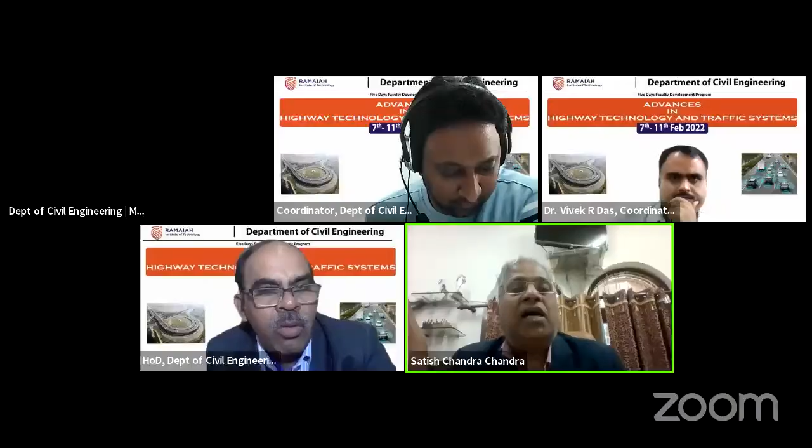Now, as regards the performance of these plastic roads, they have been very well researched and implemented in the field, and I would say they are even better than a normal road, because this plastic provides more stiffness to the pavement. So without compromising on the quality of any layer or material, these roads are as durable as a normal road. I think that answered your query, Santosh.

Regarding RAP material, Ravish, RAP material in rigid pavement is being used, but only at lab level. It has not been used in the field yet. But if you take construction demolition waste, if you want to reuse the material coming out of concrete slabs, that can be used in the lower layer in dry lean concrete, even in paving quality concrete also.

Thank you for the query, sir. We have one more question by Mr. Mohan. He wants to know if recycled asphalt pavement is used in the sub-base layer, can it satisfy the drainage characteristics, and if it does, does it serve the purpose? This is by Mr. Mohan.

You have to see that grading has to be met. When you use any material in the sub-base, the grading should be met, otherwise it will not drain well, because that is the main purpose of sub-base material. So it depends upon what material is being used. If you are recycling base material, that probably can be used in sub-base material.

Okay, so we have the last question for today, as we are running short of time, by Ms. Nagashri B from our own civil department. Can we use plastic additive as a layer-based additive instead of using it as a whole product? I couldn't follow the question. Can you ask the participant to clarify? What would be the optimum content of plastic used as an additive? That is the question, sir.

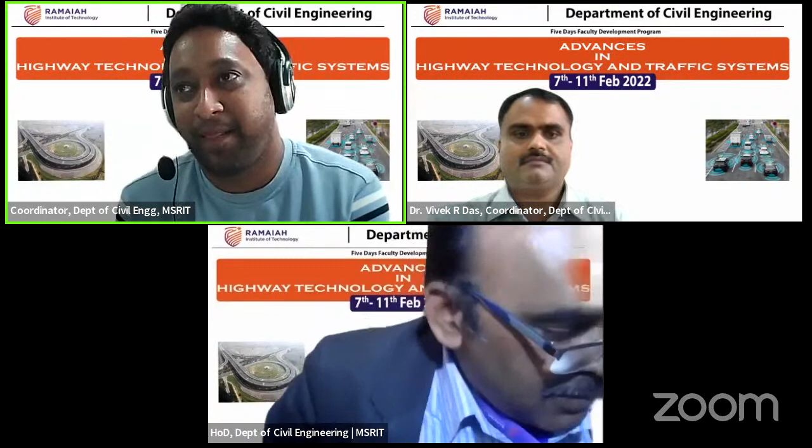Formally, I invite every one of the participants, offline and online, for this wonderful program, which our colleagues in the Department of Civil Engineering at Ramaiah Institute of Technology, Bangalore, have organized: this 5-day faculty development program with the title of Advances in Highway Technology and Traffic Systems.

And just to say a few words about this prestigious institution where I am heading as the head of the department. The Ramaiah Institute was established in 1971. Almost 5 decades of service has been put to the society, and it has got its own niche and a position in academics, research, consultancy, collaborative works, and also a large number of technical publications by my esteemed colleagues. It got accreditation by NBA since 2001 and got reaccredited up to 2024.

More than 25 research works are going on as of now, and a lot more MSc programs also happen. It's a credit to the institution and to the Department of Civil Engineering that more than 250 highly valued technical publications have appeared and many more are on the way. And of course, it also got a credit of patenting a few important innovations like total replacement of sand in concrete by pond ash. It has been patented by the Institute.

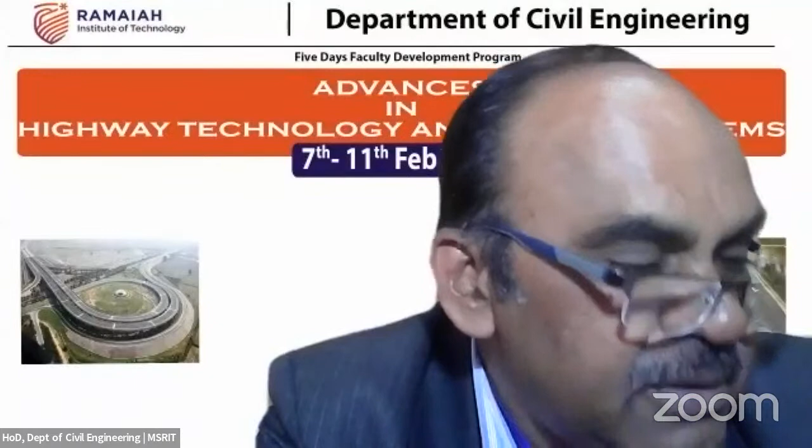And as far as the present program is concerned, it's very nice to know that we have 15 esteemed speakers. I was keenly listening to the first speaker, Dr. Satish Chandra. Thanks a lot, sir. You have extensively covered various topics, and it's very nice to have a person of your stature as one of the speakers. As the first speaker, you really set a good milestone and a nice trend. You have covered various aspects and added your experience as an academician, researcher, scholar, practicing engineer, and consultant. All in all, the essence has really percolated down to all the participants who have benefited from this novel program.

So with these few words, I once again request that these 5 days of interaction become very fruitful, interpersonal and intercommunicative. Let this be the beginning of our larger association in the days to come. Ramaiah Institute looks forward to a large number of collaborations, be it consultancy, academic collaboration, or joint ventures. We have a strong and dedicated faculty. We would like to have a lot of coordination with all of you, make a good team, and contribute in this wonderful, evolving, very advanced and very interesting field.